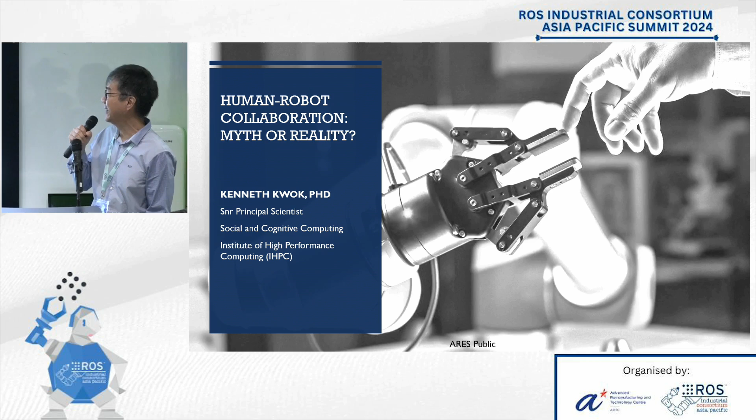So when I was asked to give a title, I came up with this, but I realized that maybe I've given myself a big challenge because also I'm coming from outside robotics to try to answer this question. But I'll try my best.

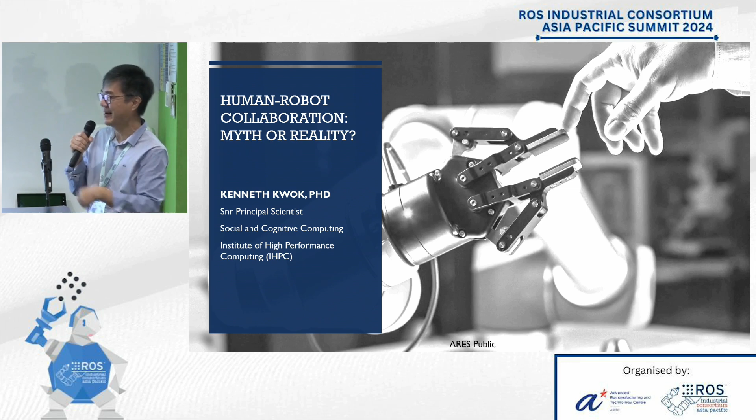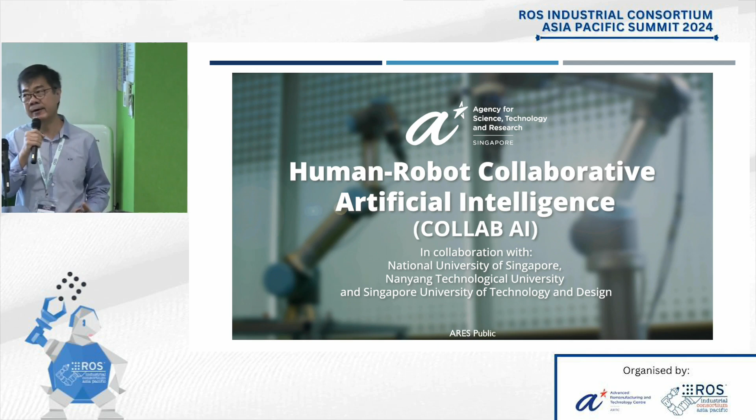I will come from the perspective of a program that I led for the last 5 years. This was the Human Robot Collaborative AI program. It was a big program involving not just A-STAR. In A-STAR we had IHPC, I2R, and of course ARTC here. And we had also collaborators from across the different IHLs in Singapore.

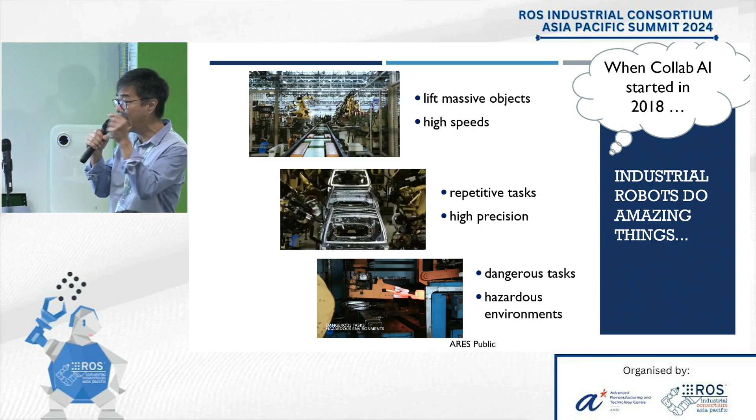As you see, because the expertise we require is very wide in this, so we needed a big team to cover all the ground. When we started in 2018, most of you are roboticists here, you would be aware that robotics have made great inroads into industry, and robots were already doing a lot of amazing things, right?

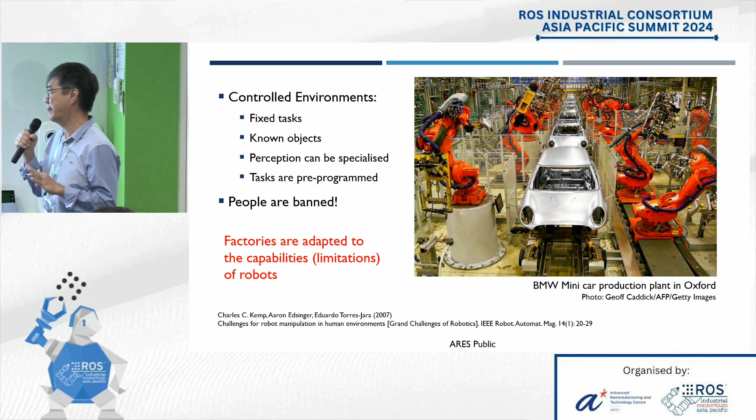Everything's pre-programmed. More importantly, you can see from this picture, there are fences. So that means that people are not allowed when the robots are working in these areas. So essentially what's happening is that factories were adapted to the limitations of robots, basically. Robots are basically quite dumb, if I may say. They're very good at doing certain things, but they are dangerous to be around because they don't know what they're doing sometimes, right? Or most of the time.

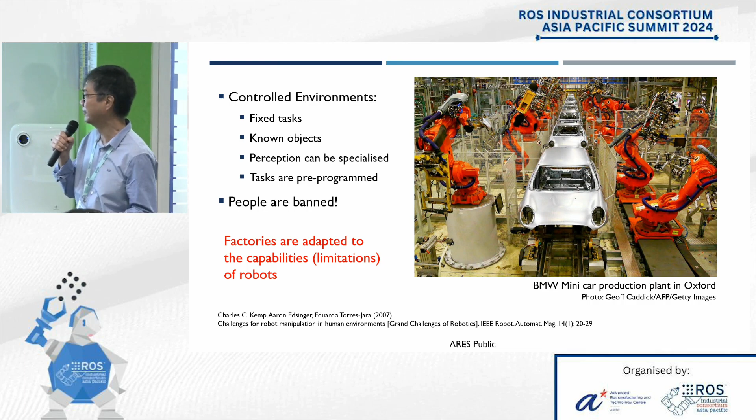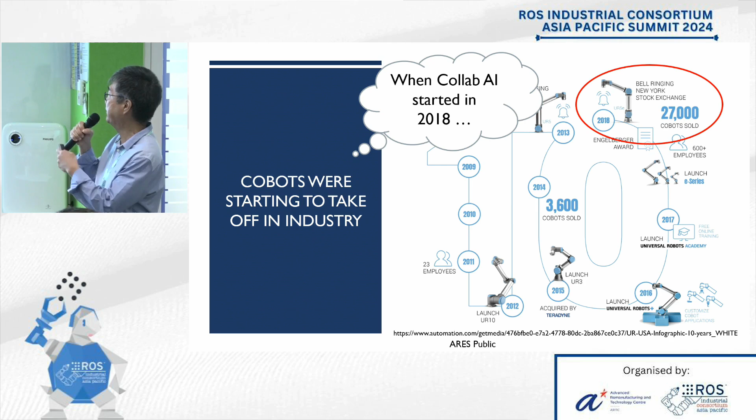About the same time, a new class of robots called cobots were coming into industry in a big way. UR is the first company that sort of sold robots, cobots in big numbers. So in 2018, they started selling like 27,000 robots. So this was an emerging trend at that time, right?

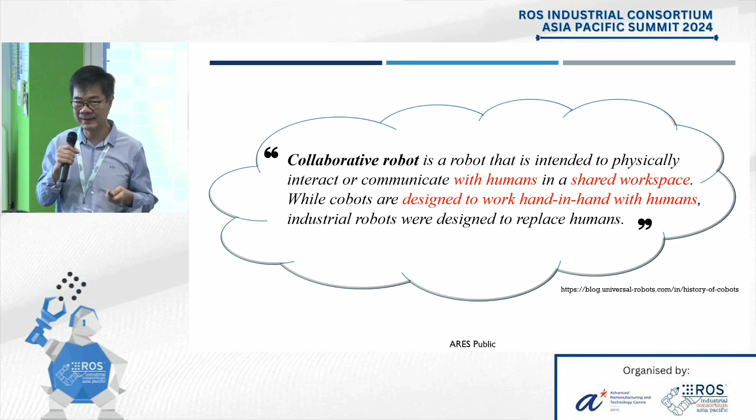And cobots are designed to work with humans, right? Instead of industry robots where humans are actually excluded. So cobots are designed to work in shared workspaces together with humans. And they're designed to work hand in hand with humans, not to replace the humans. So there is a lot of potential for cobots actually, to help humans instead of taking over the jobs.

And cobots have nice features for small companies, right? Cobots are relatively cheap. You can get one for about 50K Sing. As I said, it's designed to work within human workspaces, and they are space efficient. They don't need a lot of space to deploy them. More importantly, they are repurposable. What it means is that they can be easily programmed to do many things, right? You don't just buy them for one purpose and one purpose alone.

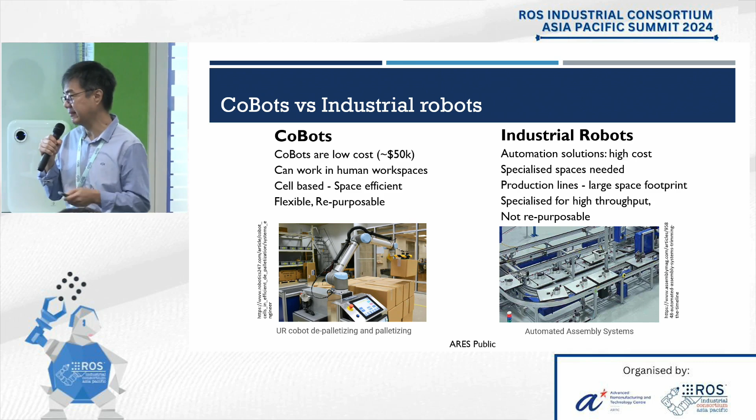So if you look at this and compare to industry robots, I think cobots are eminently suitable for smaller industry players, SMEs and so on. I think this is where this is very exciting for SMEs. The problem, however, is that cobots are still dumb, right? They lack the intelligence.

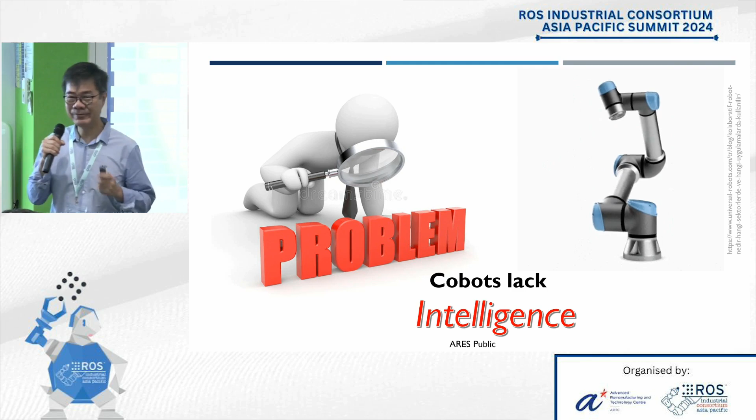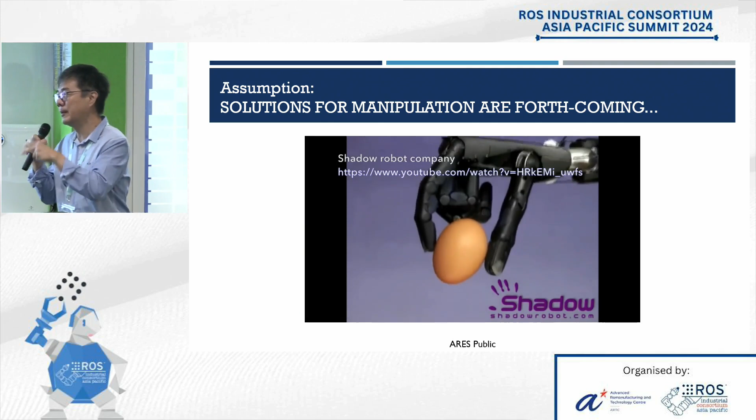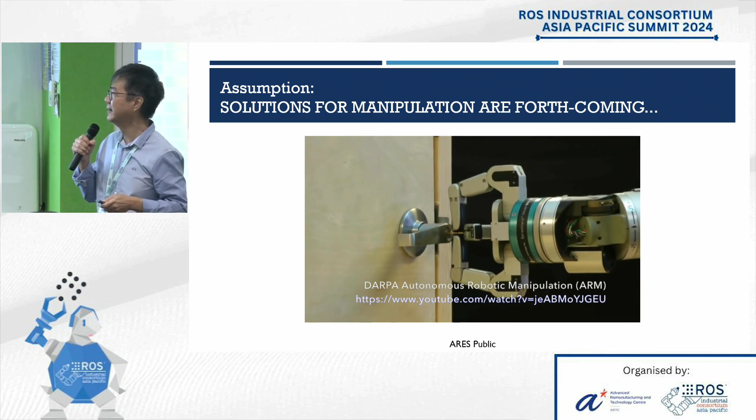That's why the Collab AI program is focusing on intelligence. But first, we make the assumption that there was this elephant in the room, right? We all know that manipulation is still a big problem. And in 2018, we already saw that things were happening that tells us that eventually manipulation should be solved. So we were making the assumption that this is not a problem that we're going to work on. We're going to work on the intelligence part of it, right?

So our goal of this program was to achieve a fundamental shift in human-robot interaction from one where humans have to learn to work with robots inside specially designed workspaces to one where robots adapt to humans, learn about humans, and work within human workspaces.

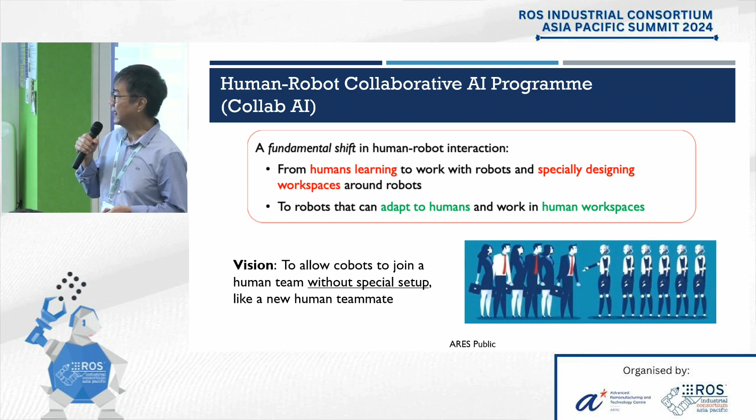This is actually very ambitious, I think we all in this room will know. Our vision is to allow a cobot to join a human team without special setup, just like a human teammate would if the human was to join a team. So we're not exactly replacing humans, we are working with the humans in the team, but the robot will come in and join the human just like a teammate.

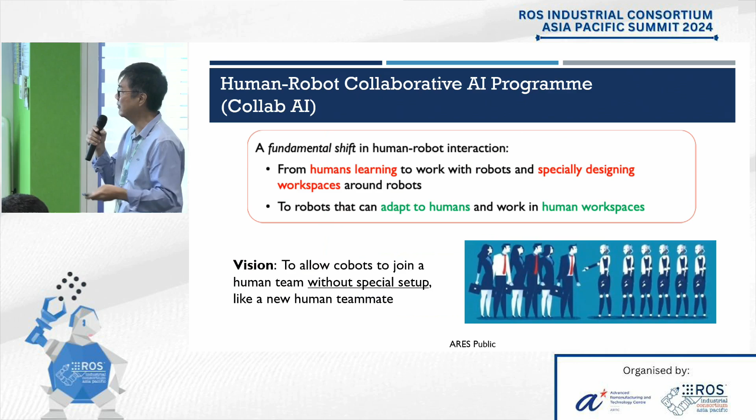But eventually, true collaboration involves very close collaboration where you work on the same thing and you basically respond to one another. So it's responsive collaboration.

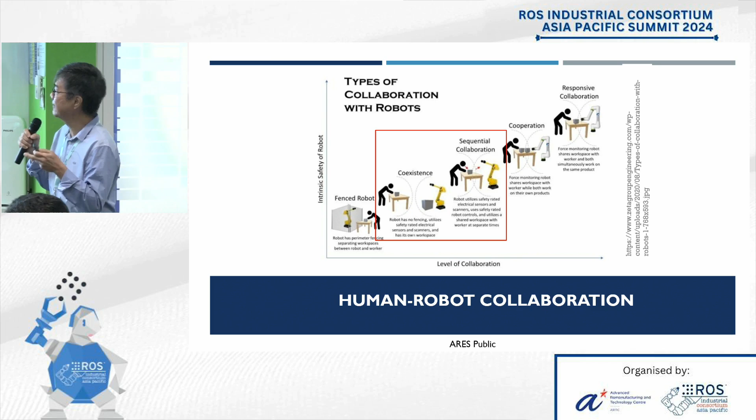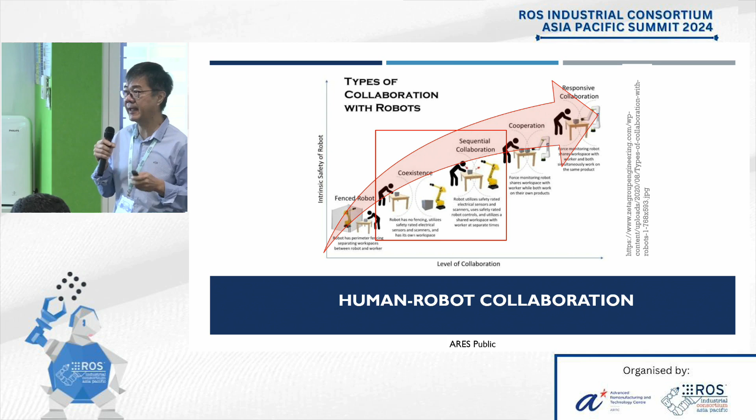Here we go. So most of the collaboration still exists in the coexistence and the sequential realm because of safety concerns, as I'll mention later. But the whole idea of Collab AI is to really move towards eventually real responsive collaboration, working together as would a human teammate.

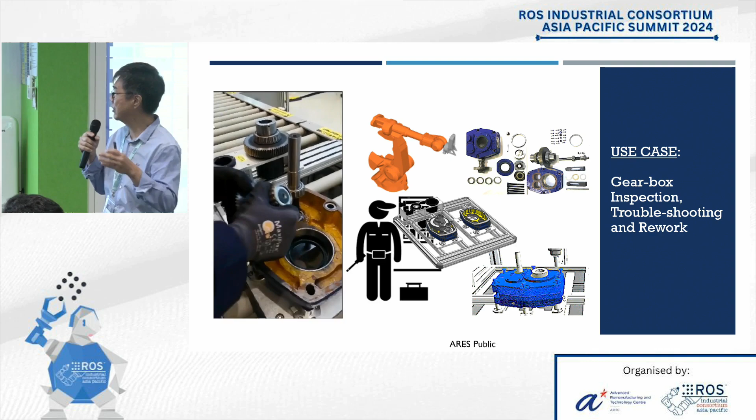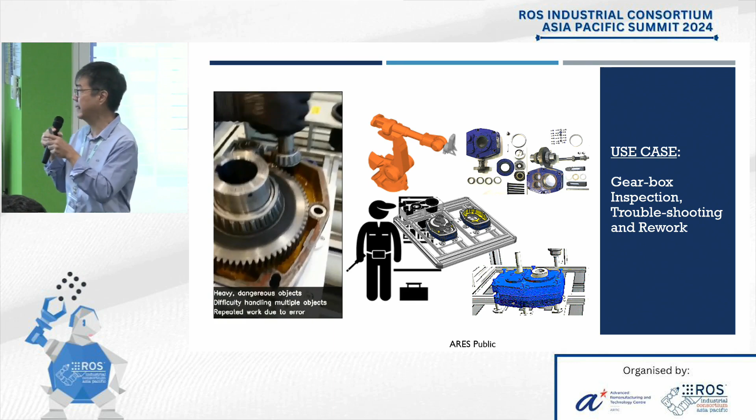Our use case initially was to have a gearbox inspection troubleshooting rework use case. You can see in that video that the equipment we're handling is quite heavy, you have to wear gloves. And to disassemble this, you actually need more than one person to do it properly because the parts have to be meshed together, and one person handling many parts would be difficult.

So the idea we had was, okay, this is human-robot teaming. If I can ask you to click the first one. So the typical task: populate casing base. I'll let you watch it first.

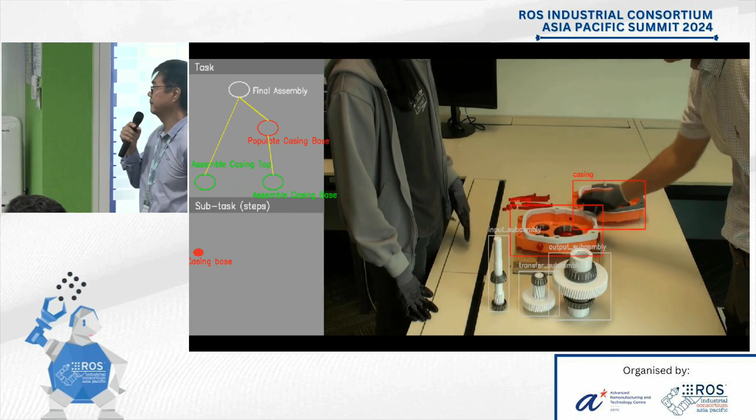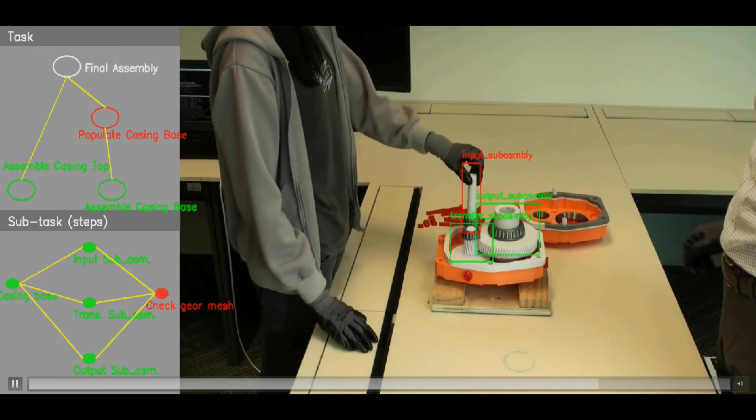You can see that you have to mesh the parts together, and you need more than one person to do it properly. Populate the casing base, complete.

Before you click the second video, I'll just say that this is a typical task for a human joining a team. We have to teach the human, or tell the human how to do a task—we don't program the human. So this is the typical task we use for this whole program, where we are trying to program robots using demonstration.

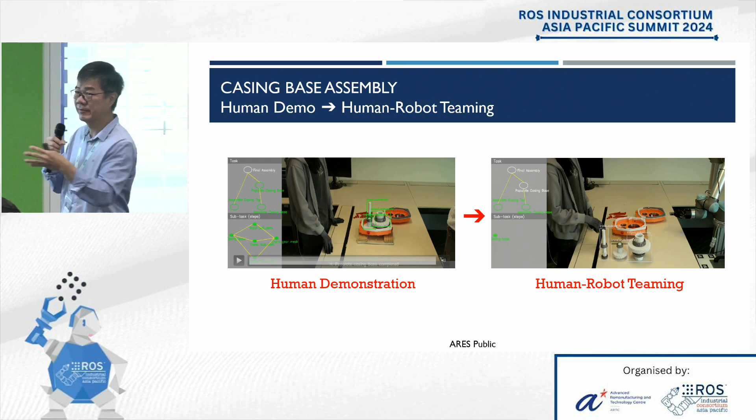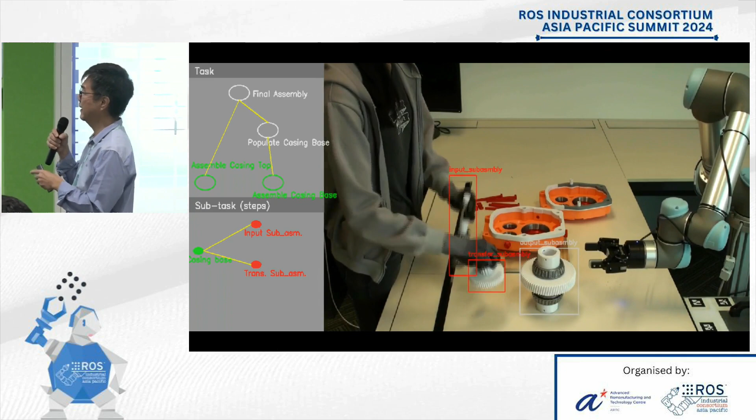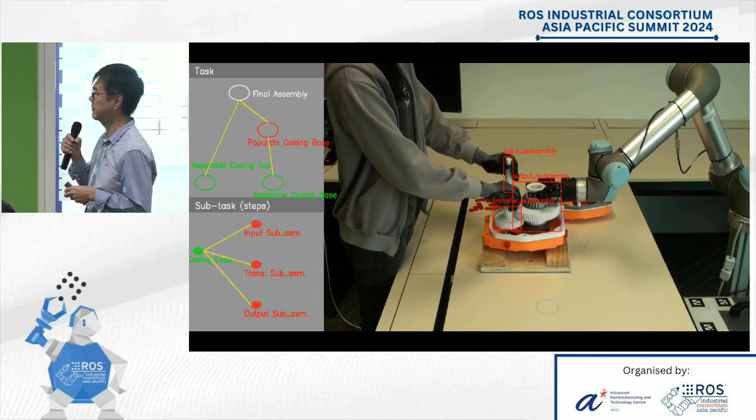If you look at the next video, what happens is that one of the roles is now taken by the robot. We actually teach the robot and extract the information in terms of the task graph you see on the left-hand side, and the robot then knows what to do at the right time by following the procedures. More on the details in the next few slides. Okay, thank you, I can click this one.

I'll talk about a few things that we needed to do in the program to achieve these kinds of collaboration. First, we need to have what we call grounded perception—this is related to vision, like the last talk. We wanted the robot to be able to use not just vision, but speech and touch as well, to understand the human when the human is demonstrating the task.

So we had this thing called instructions expressed, so verbal instructions—or assemble the sub-assemblies, for example. Then we have things that the robots can observe visually, which we call task operations—you have to recognize the person who's picking up this part and recognize the part as well. So this is what we need to do: recognize the verbal instructions, the visual operations, and then relate it to the task structure.

We did not initially build this by learning—we actually had the task structure defined first, but then we had to actually learn to ground the observations to the structure to understand what's going on.

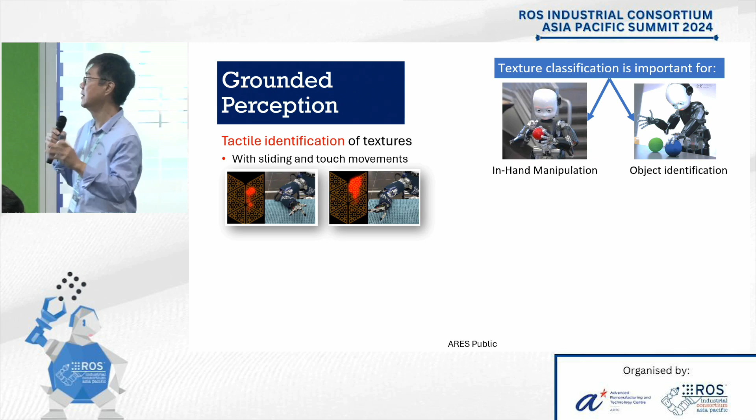We also had work on haptics, so this is where we use touch to identify textures. We have state-of-the-art achieved here, being able to recognize textures using just 1.5 seconds of contact, just like humans would.

And you get 98% accuracy for 23 textures. So that is grounding your perception.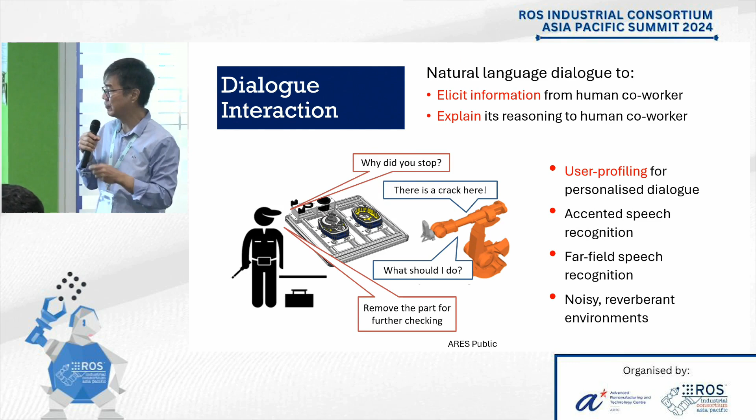Then, of course, everything comes together. You have to learn the task, understand what a human is doing. So we developed ways to make the learning more robust and able to generalize. We split up the learning into atomic parts so that we can recompose whatever we learn from the human.

Also the learning has to be done at the fine-grained level. We can't just recognize the actions—we have to actually recognize the states and also different relationships between the actions. So we developed representations for these.

And at a lower level, we have to learn the skills. So what we did was to work on things like visually guided learning, visual servos. This allows the robot to perform the low-level skills in a very adaptive way instead of having everything programmed.

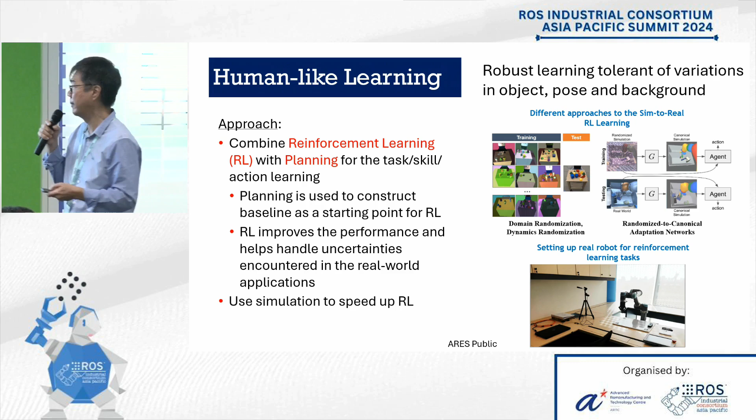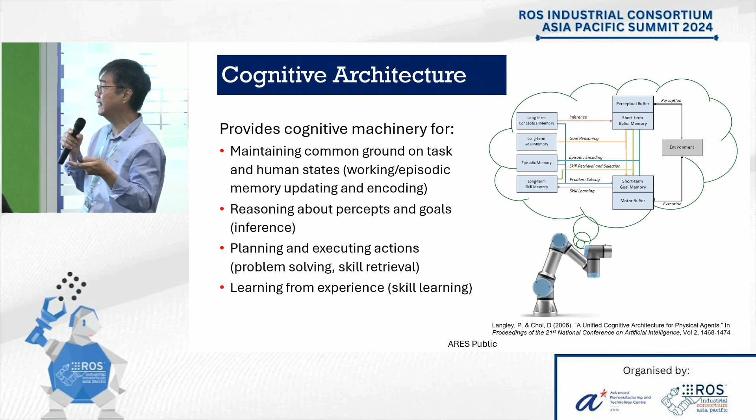And finally, we put all this together in what we call a cognitive architecture. It's well and good to be able to do individual components, but we needed an architecture to sit on top of ROS. This gives us the generalizability. We're able to learn tasks represented in the task structure at a high level, and this allows the cognitive architecture to do the reasoning and planning, again at a high level, and then work with ROS to do the control.

This is inspired by the human cognitive system. The human system has got a brain and a spinal cord. The brain works at a high level, at a slower rate. The spinal cord works at a higher rate with the hardware, so to speak—your muscles and so on.

So we have this idea of putting cognitive architecture on top of ROS, and then we had a tight integration that allows ROS to control the robots with the necessary drivers and so on for different robots.

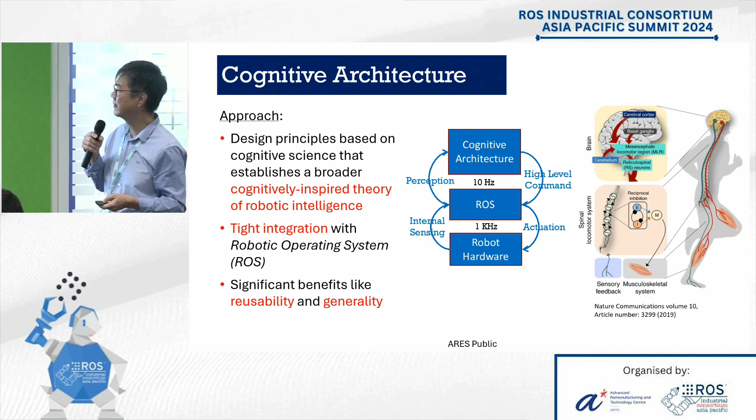At the end of this, we had the gearbox task, which was our sort of toy task, but then we worked on actual real cases with industry. The first one I'll show you is work we did with P&G in product testing. They have these bottles that they fill with different liquids, and they have to make sure the bottles survive use by consumers.

So they have different tests that they do with the bottle, and every time they had to program a different bottle, the bottleneck was the robot programmer. So we were trying to help them do the task without relying on a robot programmer—instead the technician can actually just demonstrate to the robot.

The second use case involves the visually guided manipulation that we came up with, and it was used by a company called Ariantech in urban farming. I'll let you watch the videos.

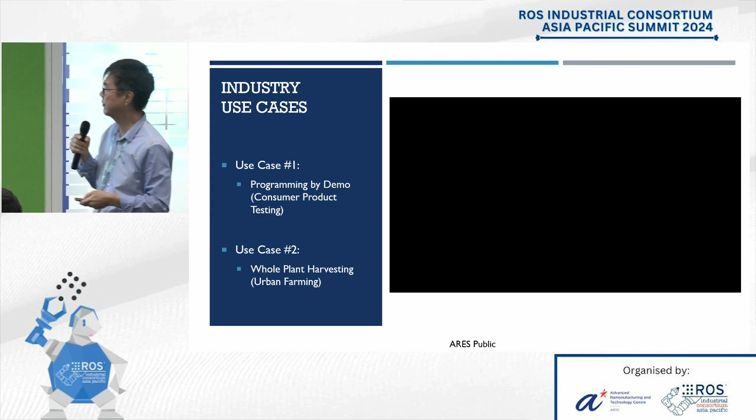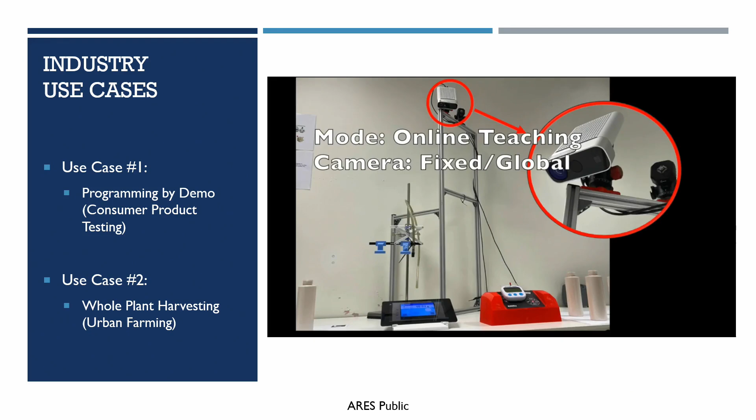This was a framework where we had the interface to learn from the human, with two modes. This is the area where the bottles are empty—this is a demonstration using a fixed camera. So the first mode is using a fixed camera. Start the demonstration.

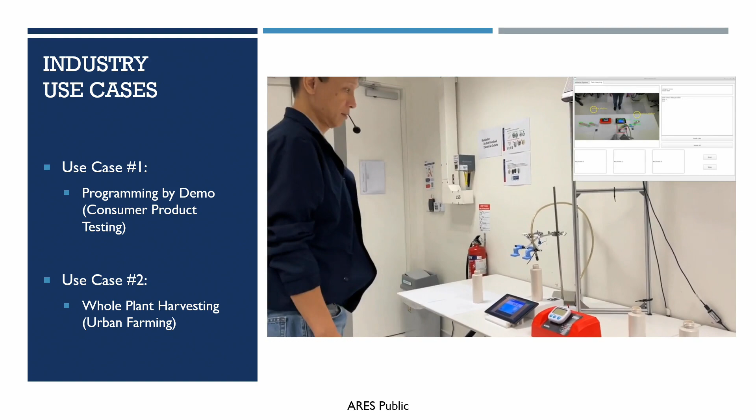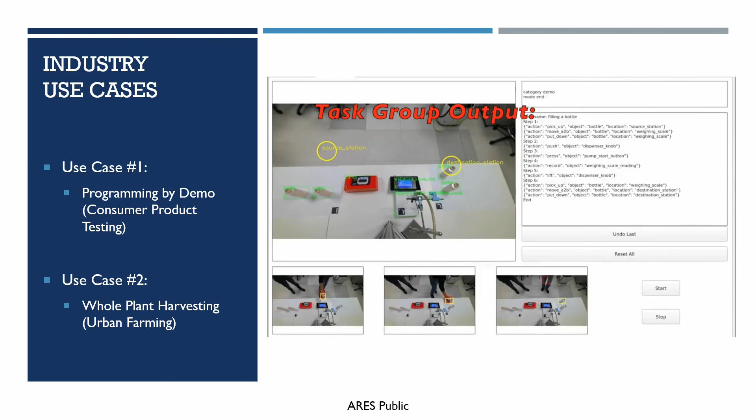Demonstration completed. So each step is demonstrated, and the robot recognizes what the actions were, like pick up the bottle, from which part, and put it onto a scale.

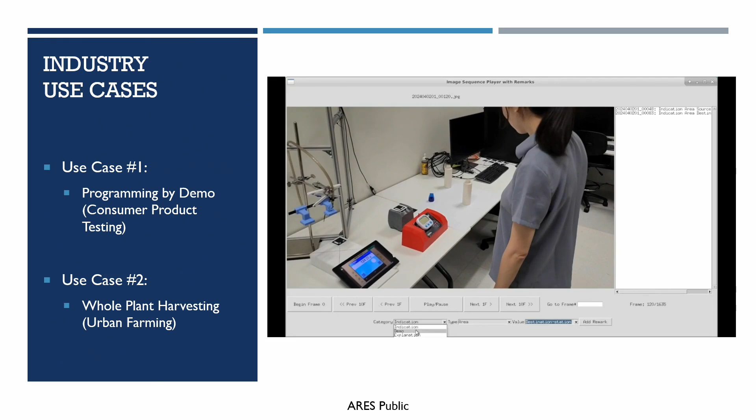Then there's a second mode where P&G requested that maybe we could do it using a normal camera, like a handphone camera. So we developed a second application using a handphone camera, with an interface to help sequence the programming.

This then gets translated into an actual program by our architecture, which is interfaced with ROS and controls the robot. Here the robot picks up the bottle, puts it on a weighing scale, and notes the weight—that's the filling, with a tube that does the filling. After completing that, it picks up the bottle again and places it at another location. All these locations were specified during the teaching.

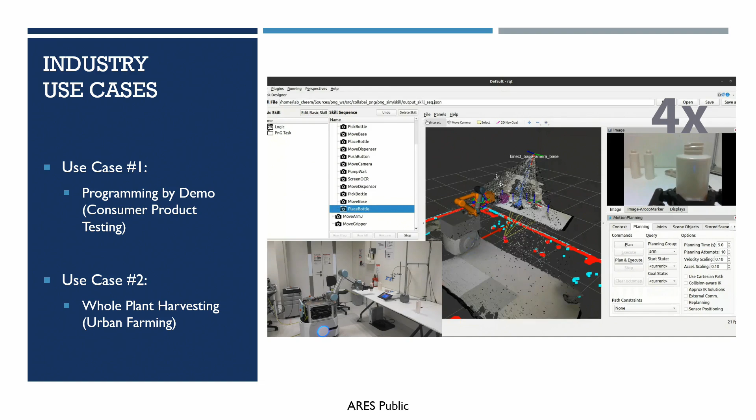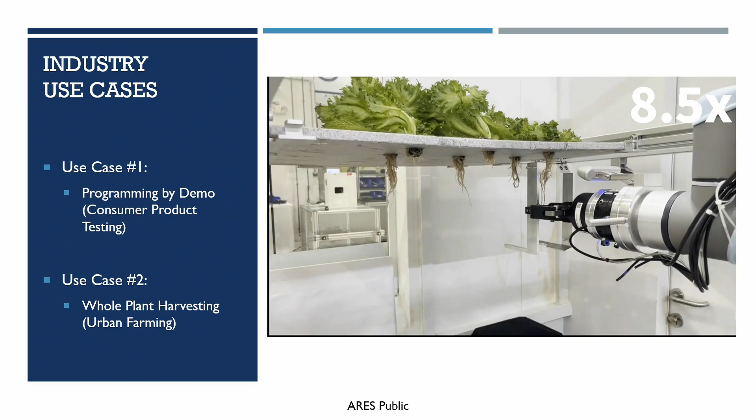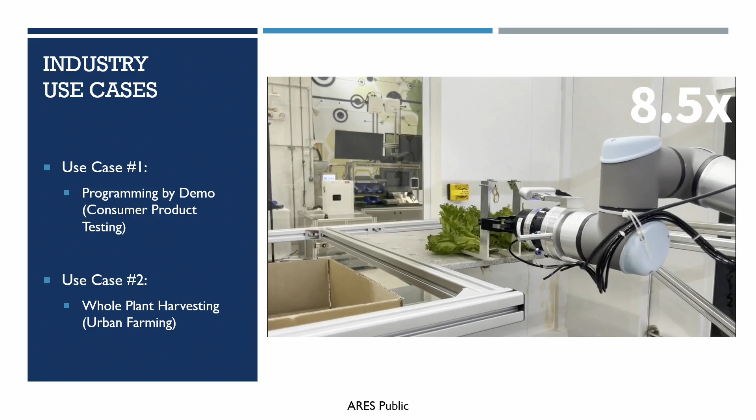So this is programming by demonstration. The next use case was visually guided root cutting. The novelty here is that they are trying to harvest the whole plant. If you go to supermarkets, a lot of the automated harvesting is actually at the leaf. They cut everything, you get loose leaves. So this company wanted the whole plant.

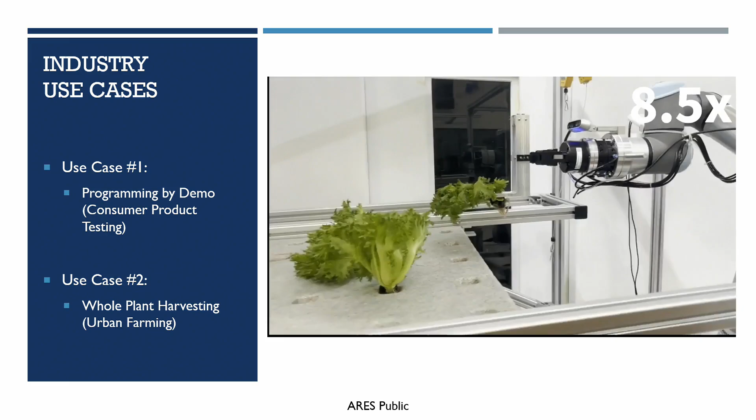Actually, this work was done here at ARTC downstairs, in close collaboration with our partners here. Okay, I think you get the idea.

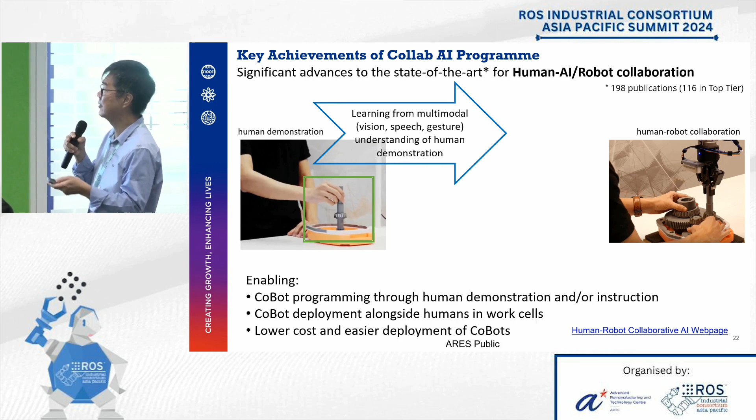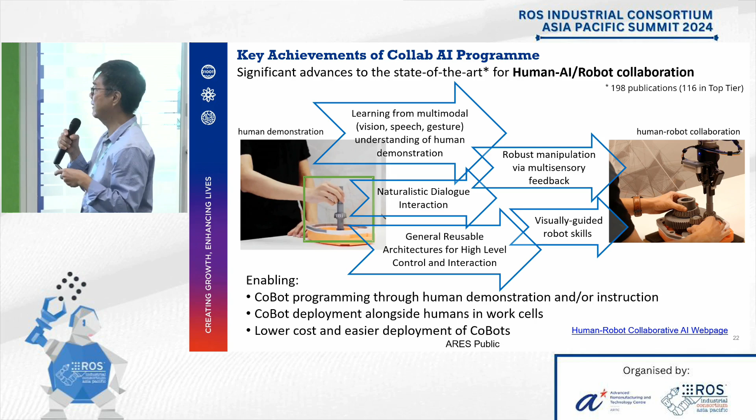So while all this was happening, maybe just to summarize a bit about our program. The whole idea, as I said, the canonical task we were aiming at is programming by demonstration. So we had to develop all the multimodal learning abilities to understand the human demonstration. We had the natural dialogue interaction, like you heard earlier in the video. And then we had to develop robust manipulation using multisensory feedback to do the control. On top of all that, we had the reusable architecture for high-level control and interaction. So all this enables cobot programming through human demonstration and instruction and so on.

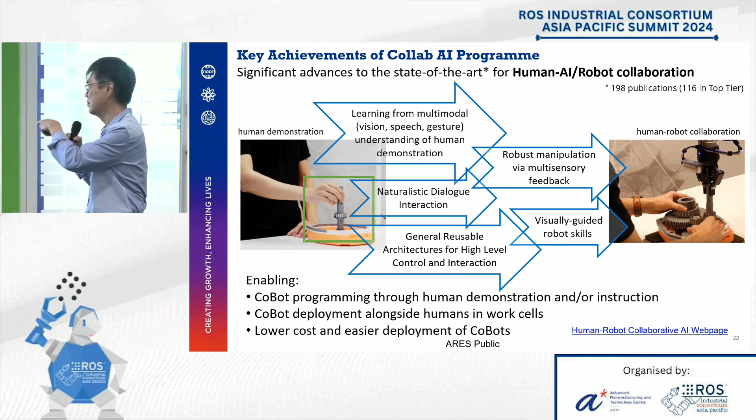So while all this was going on, in recent years we were kind of disrupted by things that were happening out in AI. Everybody here is familiar with ChatGPT, an example of what we call LLMs, large language models. To be honest, as an AI person, I was amazed at how we got here in the last 10 years. If you asked me 10 years ago whether we would achieve this, I'd say it's impossible. But it's amazing what deep learning can do. The scary thing is we don't really know how it does it.

Okay, so that's LLMs. And the other part to this is now people are building VLMs, vision language models. So the large foundation models now include visual information together with language. That gives us the ability to understand speech and gestures, gestures in terms of vision. Out of the box, in AI we call it zero shot, you can understand human speech without all the fine tuning and training. Interestingly, it gives us common sense as well, since a lot of language encapsulates knowledge about the world, which is common sense. This was a big problem for AI until now. It also allows us out of the box to recognize objects. In our work, we had to specially train all the object recognition, so hopefully with advances in VLM we can do this zero shot.

It gives us more flexibility. And then at a larger level, you have to understand the scene - scene understanding, recognize objects, how they're placed, the relationships, and so on. So this is the power of LLMs and VLMs.

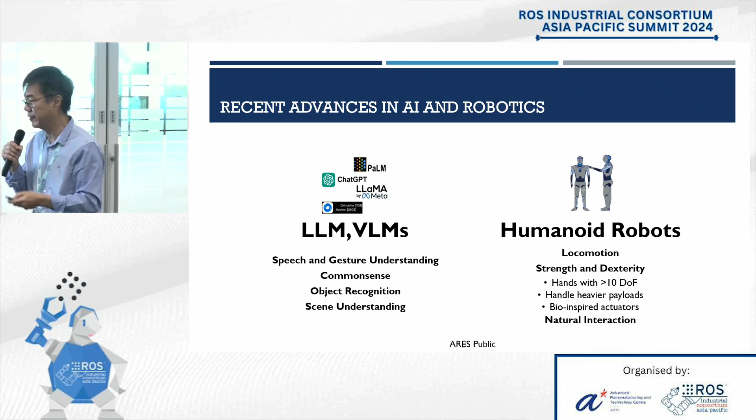So first, I'll give you a video on voice control. This is work that we did after the program ended. We integrated LLMs into our work, and you can actually try this yourself upstairs. We have a demo upstairs. We call it the claw machine.

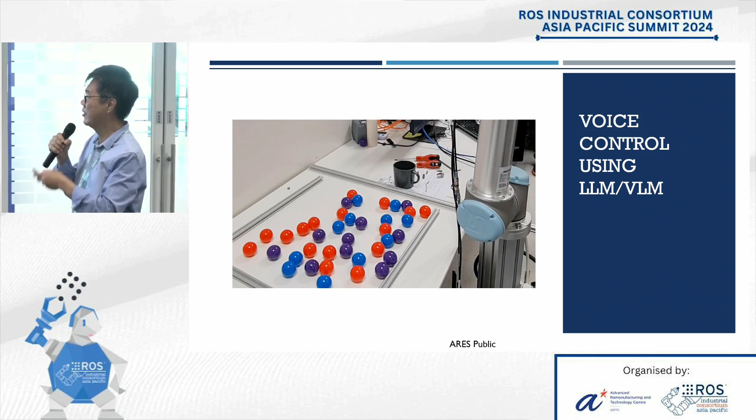I'll start. Pick up a red ball at the corner. Sure, let's proceed to pick up a red ball at the corner for you.

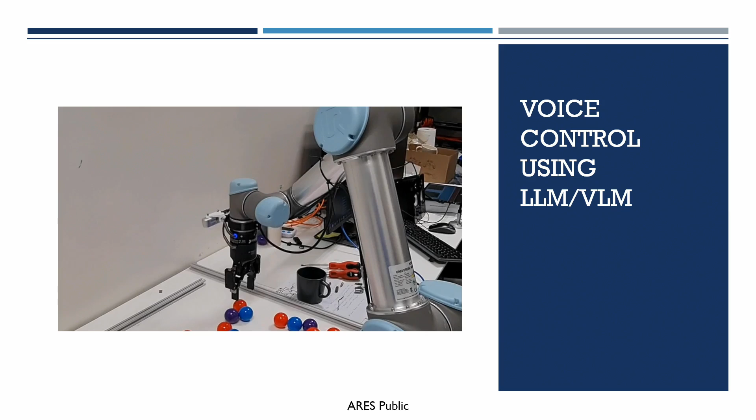Is this the ball you want? Okay, pick it up. Great, proceeding to pick up the red ball at the corner for you.

Pick up any ball that you like. I'm sorry, but I can only pick up specific objects based on the request. If you have a particular ball in mind or any other specific request, feel free to let me know.

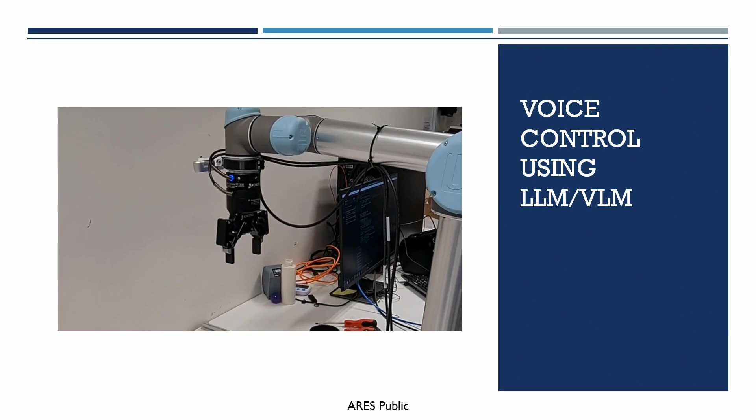Okay, pick up one of the purple balls that is not next to a blue ball. Sure, let's go ahead and pick up one of the purple balls that is not next to a blue ball for you. That's right next to the ball. Is this the ball you want?

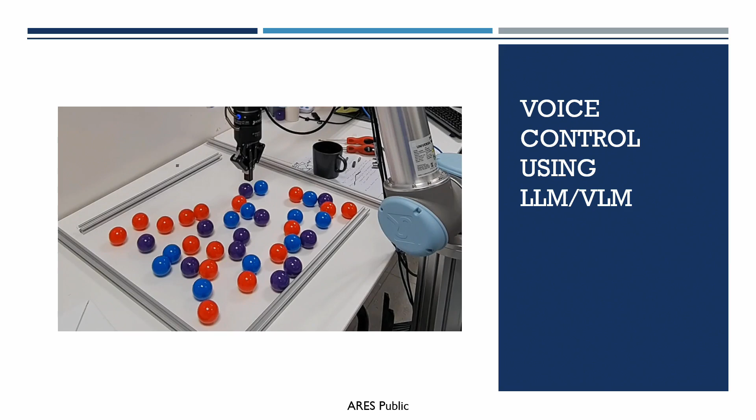No, it's right next to a blue ball. No, let's start again. Got it, let's start fresh.

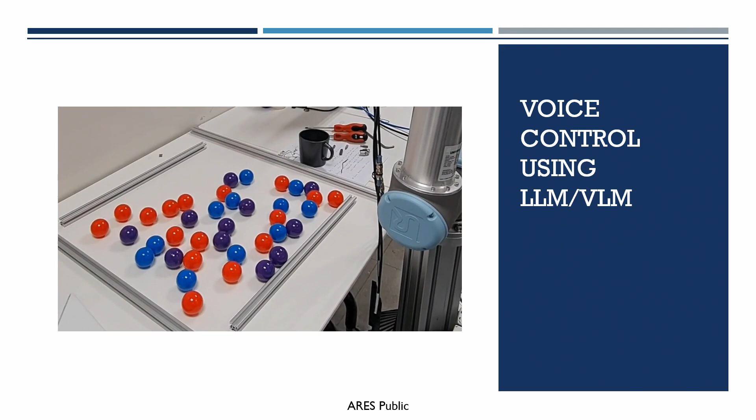Pick up one of the red balls that is next to a blue ball. Sure, let's go ahead and pick up one of the red balls that is next to a blue ball for you. Yeah, I'll stop it there. I think you get the idea.

So you notice the interaction is natural and it's really zero shot. All this was never rehearsed, right? You just tell it to do what it does, and the instructions are quite complex. It doesn't always get it right, as you saw, so it's not perfect. So that's something you need to work on if you want to deploy it in mission-critical tasks.

But the potential is there, so it makes it a little easier to string together. There are tools out there - what we were using were things like ChatGPT, Grounding Dino to recognize and ground the objects. And then there's LangChain that sort of chains everything together. So the tools are out there, you can actually put this all together very quickly. I think we did that in less than a month. So there's large potential in terms of natural language interaction.

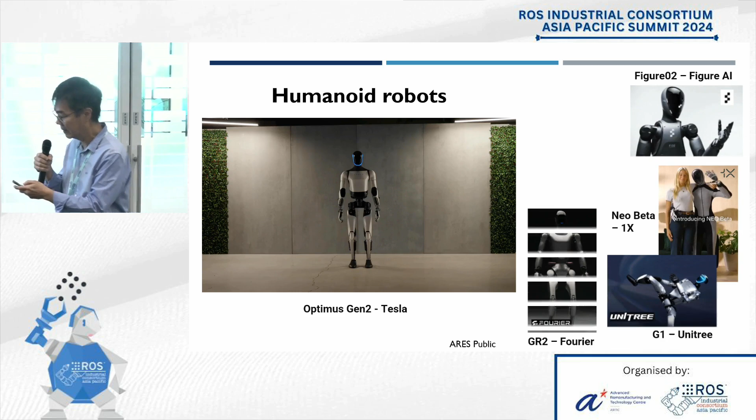The other thing I pointed out was the advances in humanoid robotics. Some of you may have seen this already, but I'll play it anyway for those who haven't. You may help me click that, if you don't mind, to play the video.

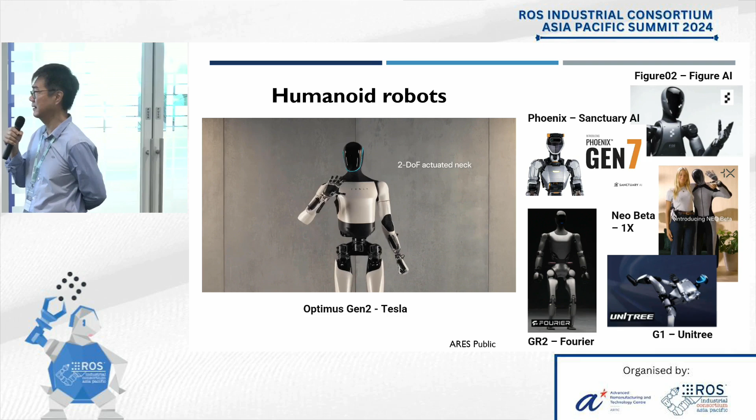So this is a promo video from Tesla. It features some of the advances, this was from 2023. I think lately they have even more advances. So someone said this robot walks like one of the US presidents, or ex-president.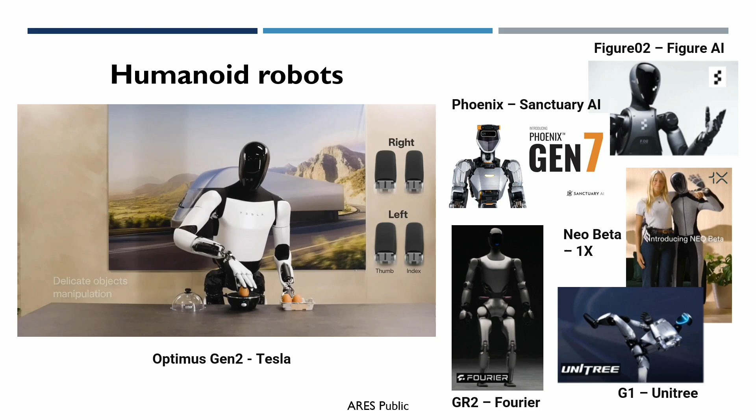So the dexterity, the movements are actually quite amazing. To me, as a non-roboticist, I'm quite impressed. But how much of this is actually autonomous? There are some questions about this still. All these videos are very sleek. You can go and look for all these other humanoid robots as well.

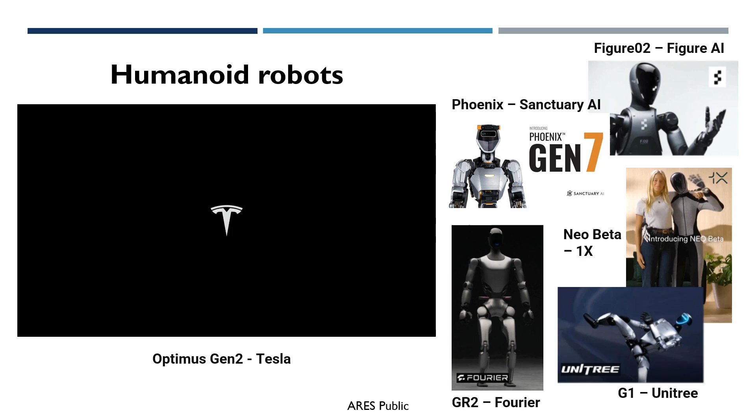They all have very sleek promotional videos. In fact, there was a bit of a buzz lately because Tesla had an event and they showcased these at a live event. The backstory is that Elon Musk told the team, I think a week before, he wanted them to deploy. So a lot of the actual demonstrations were teleoperated behind the scenes. This created a bit of controversy after that, but the team didn't have a lot of time - they had one week to deploy, and everything looked very impressive, but quite a lot of it was teleoperated. So we don't really know the intelligence, how good it is right now, but in terms of the mechanical parts, the advances in form factor, I think it's quite impressive.

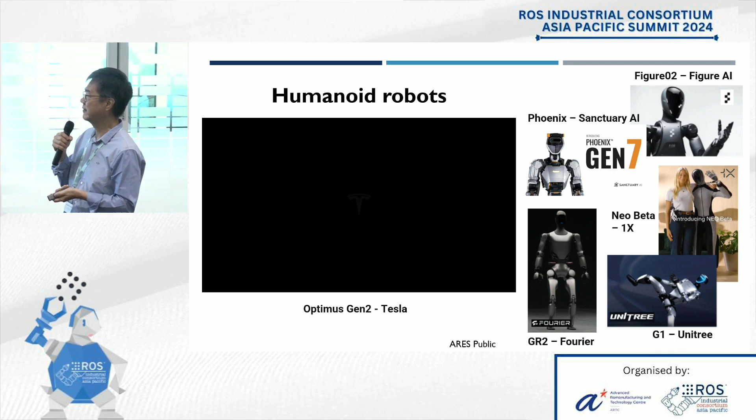So the potential is there. Humanoid form factor is especially suited for human environments because it's made for humans. You need to open drawers, you need to click buttons, you need to handle messy floor areas so wheels don't work in such environments. So humanoids are good for that, but there are issues as well.

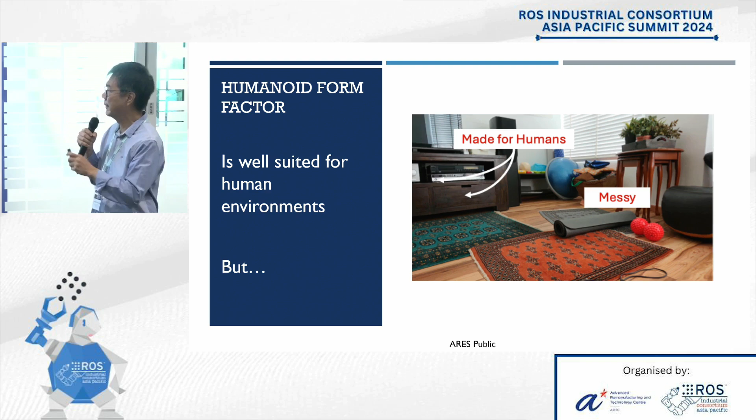So I will next talk about a few challenges I see for attaining real human-robot collaboration. The first, of course, is safety. For cobots, this has been handled in terms of the separation of space, like I mentioned earlier. In some situations, you can have sensors that detect when a human is close enough, then you have safety-rated stops. Or you have ways to control the speed and power of the robot adaptively through sensing. So the safety can be controlled to some extent using sensors.

Even so, my understanding is that currently a lot of industry is still finicky about this. They're not so confident because you can still have accidents. But in a sense, it's a bit like humans, right? Human and human work together - it's never 100% safe. Sometimes a human can injure another human also. But that's the thing, safety is still top of mind, and it may be a limiting factor.

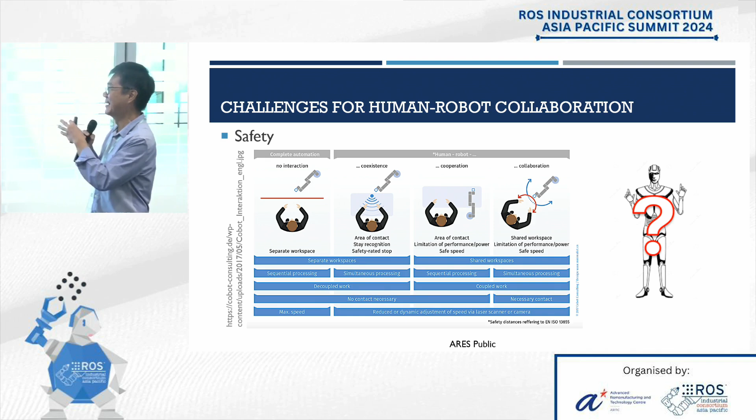But even more of a problem is humanoids when they are in very open-ended tasks in your living room, for example - do you trust it? So safety is a big concern. How we get there is not clear, right? So this is a big, major challenge.

Robust manipulation remains a challenge. Although we've made a lot of improvements, to really be adaptive in motion planning, you have robots working next to each other, your action planning has to take into consideration other team members, could be humans even. Handling soft, deformable materials is still a challenge for robots. Then there's precise manipulation - one of our tasks now is electronics testing, replacing humans in testing products by inserting USB cables. Not easy for robots still today.

I think this term, physical AI, was coined by my friend from Intrinsic. I think this is the next frontier for AI. We've had a lot of improvements in LLMs and VLMs with perception. Now it's the action part, where you have to actually physically interact with the world. This is the next challenge for AI.

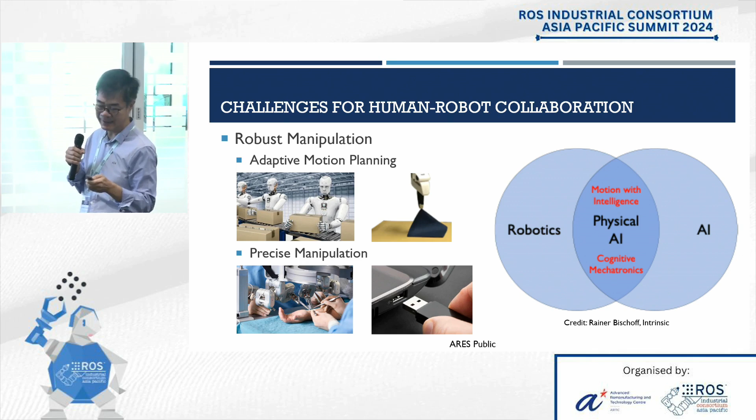Finally, of course, we are working with humans. There are a lot of things we take for granted when humans work together. Something called theory of mind in psychology means you have to understand what the other person understands - you have a theory of what the person's mind is. I need to know your assumptions in order to work with you in the right way.

You need to understand human intentions and needs. There are certain norms when you talk about social spaces. One of the projects we're going to work on with ARTC is giving robots and humans a certain protocol to work together in shared spaces. This is still an open problem. Otherwise you have an issue like the robot controlling the lift and humans get shocked - how come the lift is moving by itself?

And then social common sense - there are a lot of things we assume the other person knows. You don't do certain things. For example, with an elderly person, you don't overwork them, you treat them with respect. Social common sense is something we take for granted. A lot of things from human-human interactions have to be carried over into human-robot interactions if you want to really do true collaboration.

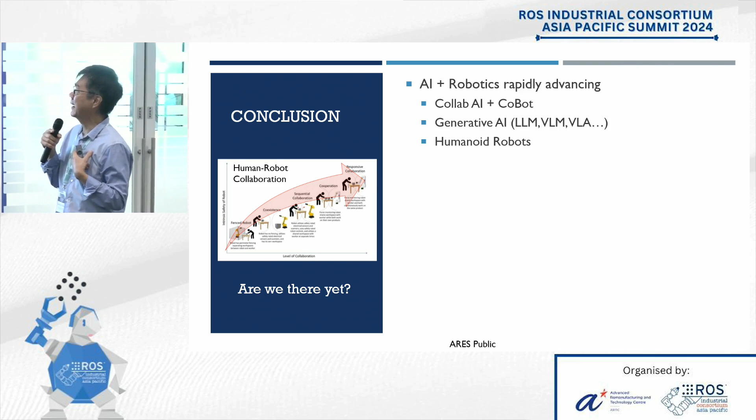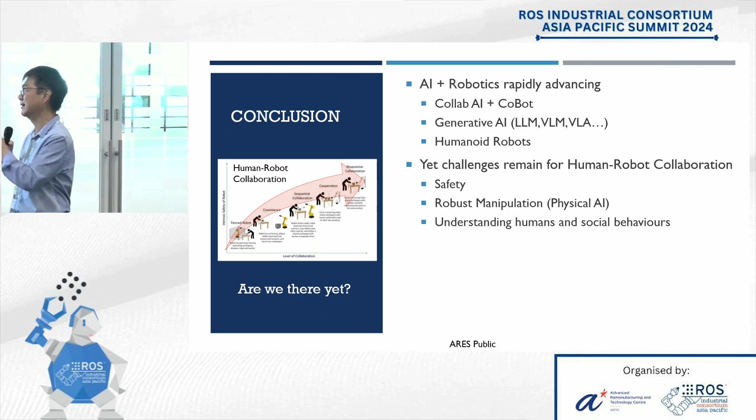So I think this is my last slide. So are we there yet? I started with these questions - I'm not sure if I've done it justice, but here are my conclusions. I hope I showed you that AI and robotics are advancing quite rapidly, in our own work as well as in the general AI area, with generative AI models and humanoid robotics. Yet there are still major challenges that may stand in the way of true human-robot collaboration. My answer is we're not quite there yet, but we've done quite a lot at this point. And what do I think will happen in the next 10 years?

I think cobots working in work cells for SMEs is something I'm really excited about - we're trying to make that happen. In Singapore, the take-up of cobots is still very low, and I think there's a lot of potential there. This is the first target for my team - we're trying to see how we can introduce cobots with intelligence to SMEs. Humanoids in factories could come about, but not in your homes yet, because as I said, safety is the main factor.

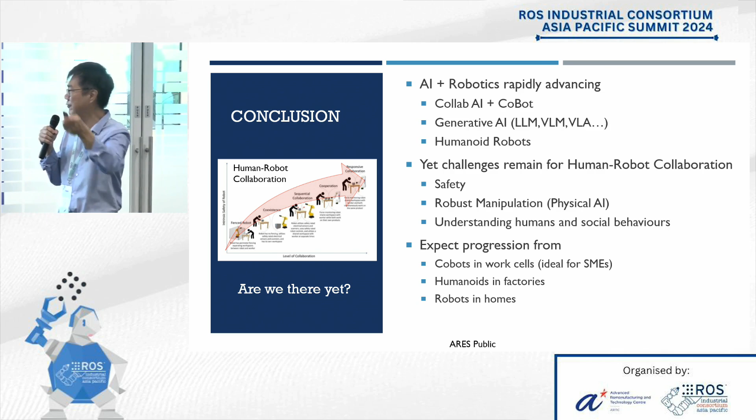Are you comfortable having a humanoid in your home at the moment? Even though it costs like 20,000, which is what Elon Musk is targeting - he can sell his robot at 20,000 and expects billions to be sold very soon. Well, that's his vision, I'm not sure. So robots in homes, I think, will be the far future, a question mark. Thank you for your attention.